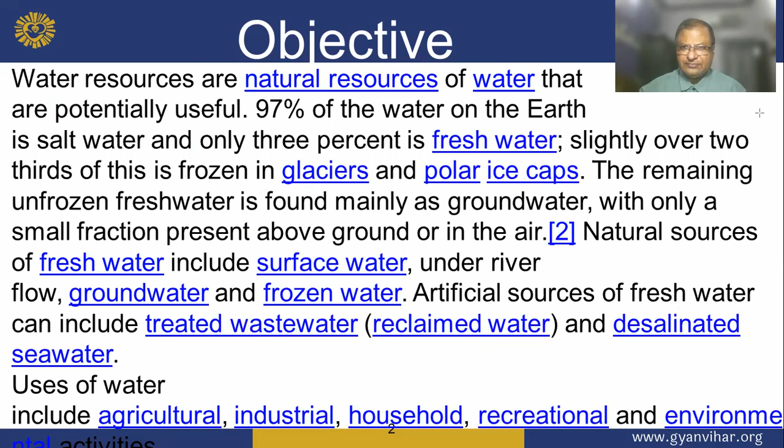Water resources are under threat from water scarcity, water pollution, water conflict, and climate change. Fresh water is a renewable resource. The world supply of groundwater is steadily decreasing, with the depletion occurring most prominently in Asia, South America, and North America, although it is still unclear.

how much natural renewal balances this usage and whether ecosystems are threatened. The framework of allotting water resources to water users, where such a framework exists, is known as the water right.

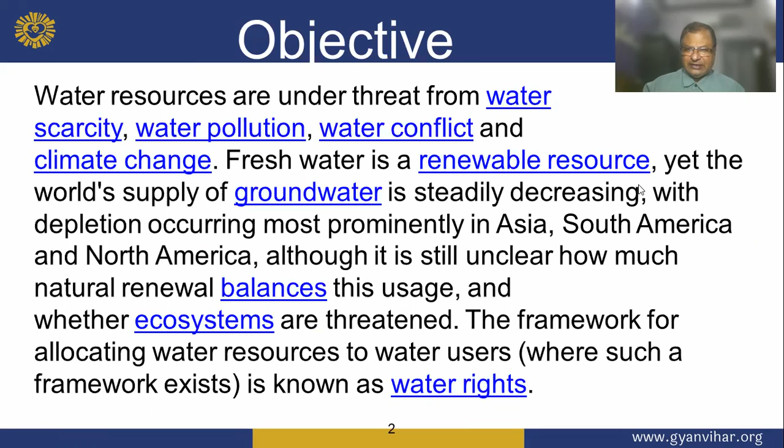So water is a vital element in each of our lives. Not only is it essential to our health, but we also use it for numerous household tasks. Every day we use water for cooking, bathing, cleaning, and drinking.

But how often do we think about its source? Where does our water come from? How is it treated? How do we know it is safe to drink? To answer this question, it is important to go back to the basics.

There are two main sources of water: surface water and groundwater. So, my dear boy, water is found in rivers, reservoirs. Groundwater lies under the surface of the land where it travels through and fills openings in the rock. The rock that stores and transmits groundwater is called an aquifer.

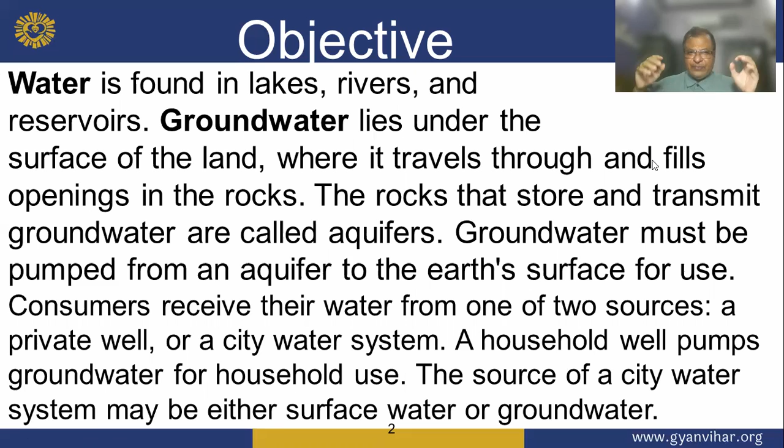Groundwater must be pumped from an aquifer to the earth's surface for use. Consumers shall receive their water from one of two sources, a private well or a city water system. A household well pumps groundwater for household use. The source of the city water system may be either surface water or groundwater.

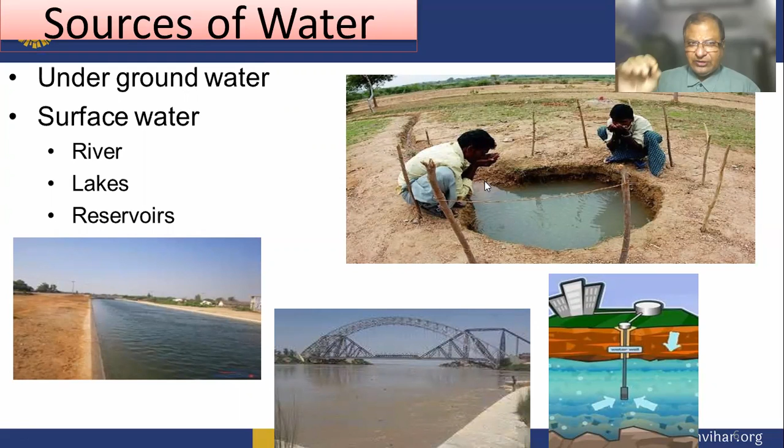Thereby, this is a photograph of groundwater and surface water. So, underground water and surface water means a river, lake, and a reservoir. Correct. Source, that is the main source, our main source is surface water. So river, lake, and reservoir.

Water storage. Treated water is pumped to a storage tank. A storage tank is often elevated. A storage tank serves two purposes: it stores the water until it is needed, and it reduces the peak demand on the treatment facility. So elevated water tanks create pressure in the water distribution system.

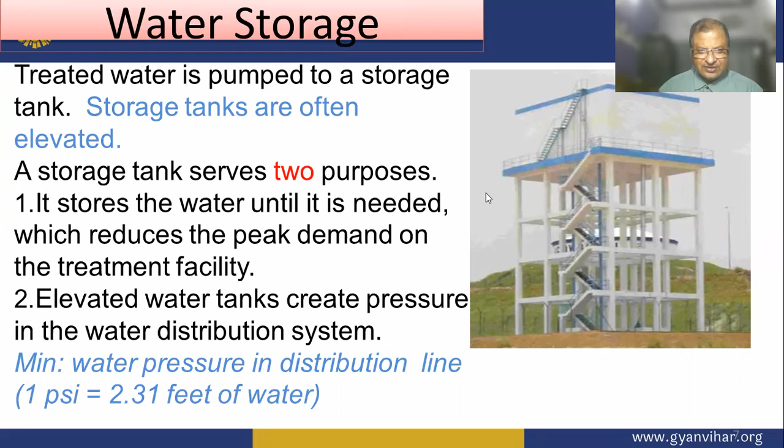This is the water distribution system. This is natural resources. So this is the water resources system.

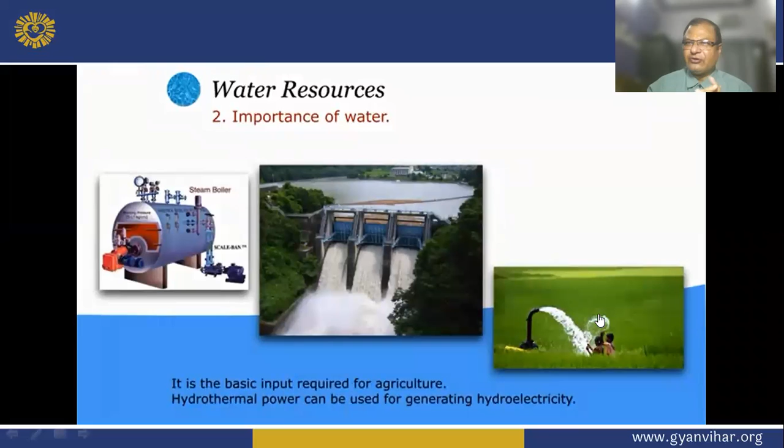So we will see the importance of water. It is very important for our human body, helpful for the survival of the body. Now, importance of water for agriculture, ecological purposes, and for factories.

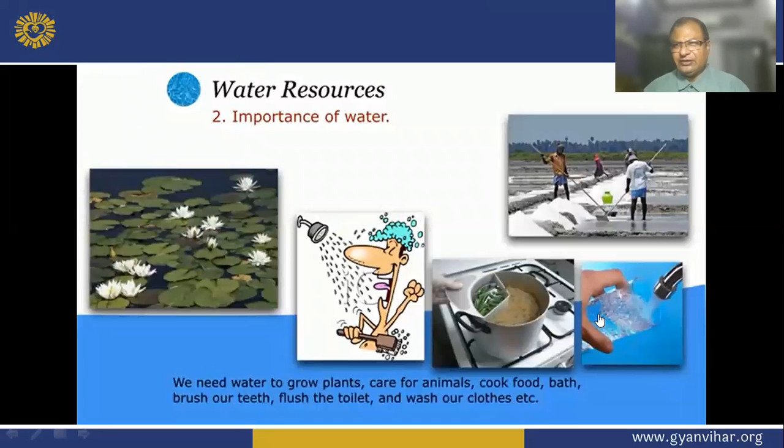So now we will discuss about the water cycle also. How soft water has come.

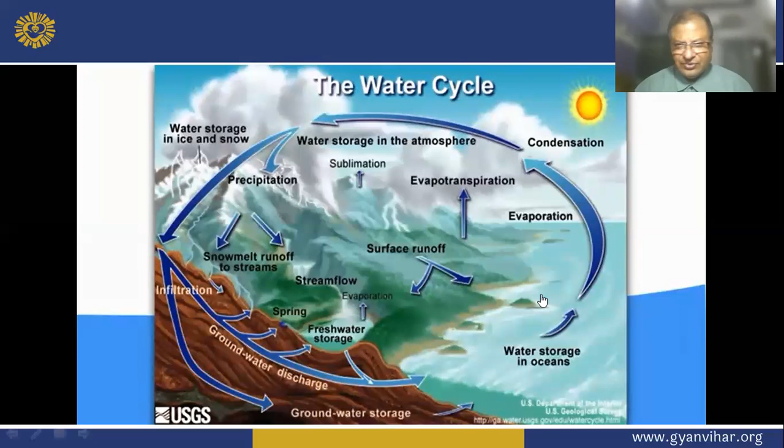So in this case, we will discuss what is the water quality for us. Water is one of the most important materials required to sustain life and is considered as the source of human immunity.

It is rarely available in natural form because it has great tendency to dissolve various substances while flowing on the surface of earth. The topic of water quality focuses on the presence of foreign substances and their effect on human and other aquatic life.

Now, at present, more than 85 chemicals are listed in the US EPA drinking water standard, whereas the World Health Organization listed over 100 chemicals in guidelines for drinking water.

So in addition to public need, water that is soft, non-corrosive, free from pathogens and suspended solids.

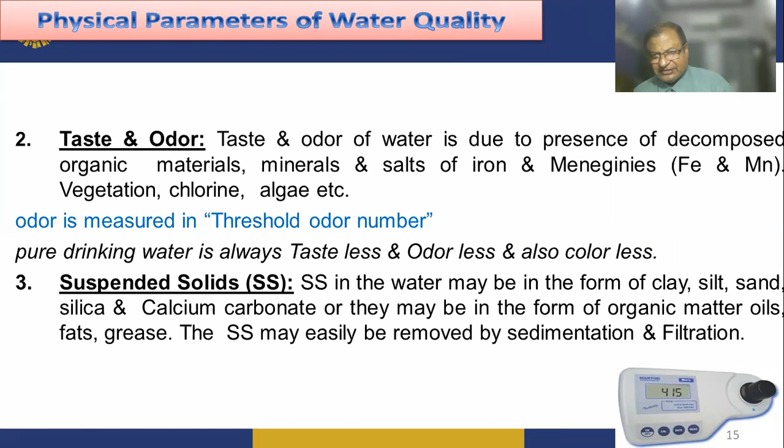Suspended solids in the water may be in the form of clay, silt, sand, and silica, calcium, and may also be formed of organic matter, oils, fats, and grease. The SS may easily be removed by sedimentation and filtration.

Now, my dear boy, turbidity. Turbidity is caused by SS fine insoluble particles, silt, sand, clay, and algae. So turbid water does not allow the passage of light, which is either scattered or absorbed depending upon the size and surface.

So completely treated water has turbidity of less than 1 turbidity unit. Now clear lake water has 25 TU, whereas muddy water has 100 TU. So turbidity is measured by the Jackson turbidimeter.

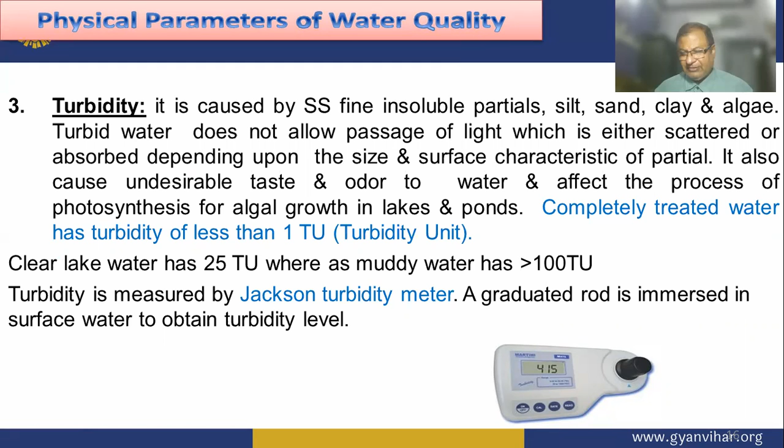A graduated rod is immersed in the surface water to observe the erosion and turbidity level. So therefore, this is the turbidity measurement.

Now we will discuss about temperature. Can you drink hot water regularly? Thereby, in drinking water, the temperature is required for drinking of water.

So solubility, viscosity, and chemical reaction are influenced by temperature. More quantity of chemical gets dissolved at higher temperature, but gases are released. Water should not have higher temperature because due to the heat, it will be converted into vapor.

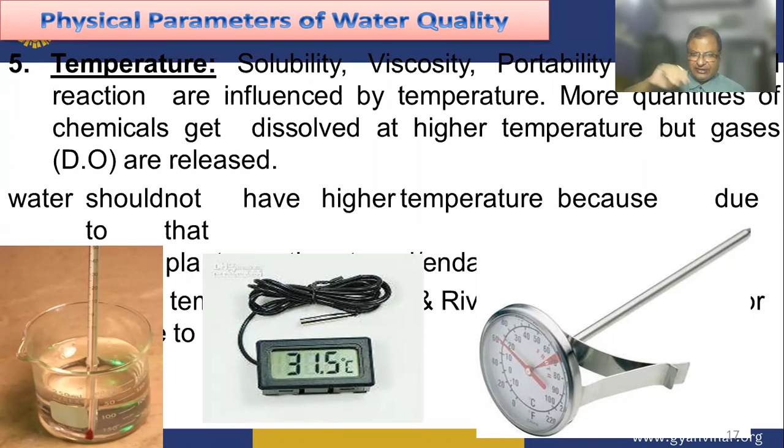The presence or absence of living organisms in the water can be one of the most useful indicators of water quality. The variety of species, the variety of fishes present in the lake, signifies unpolluted water. So, microorganisms: bacteria, algae, protozoa, and virus.

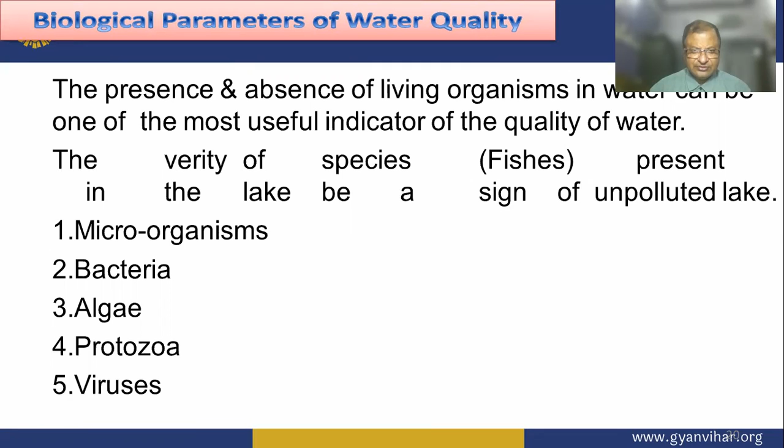Water requirement of any town or city is determined by two factors: first, consumption per head per day, or per capita demand, and population demand. P is the population of the city or town.

If Q is the total water requirement in a year, then per capita demand is calculated by the following formula: Q divided by P into 365, in liters or gallons per day. So what is per capita demand? This is the keyword, per capita.

Every person, how much water is consumed per day, on average over one year — that is called per capita demand.

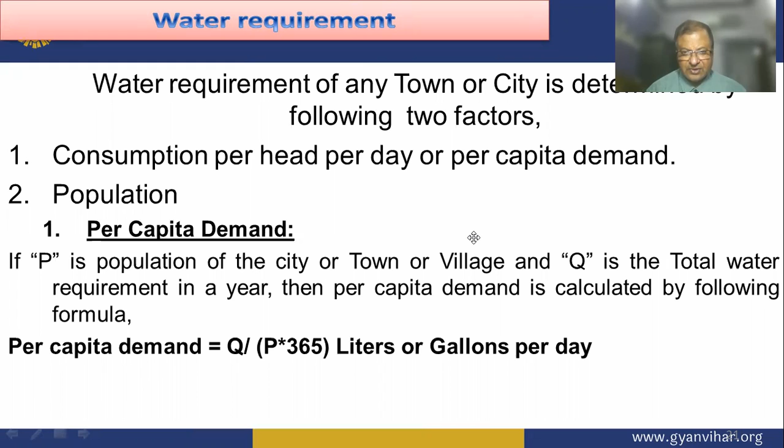Various types of water demand: domestic water demand, industrial water demand, public water demand, fire water demand, and losses and wastages.

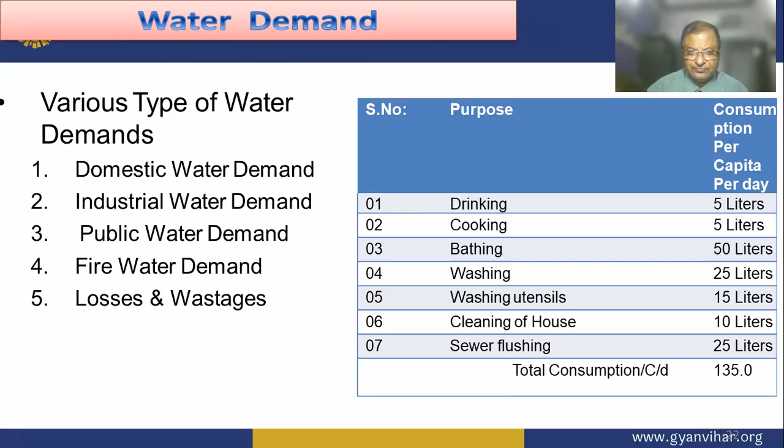A few important waterborne diseases to know about: salmonella, rotavirus, polio, hepatitis A, and so many sicknesses.

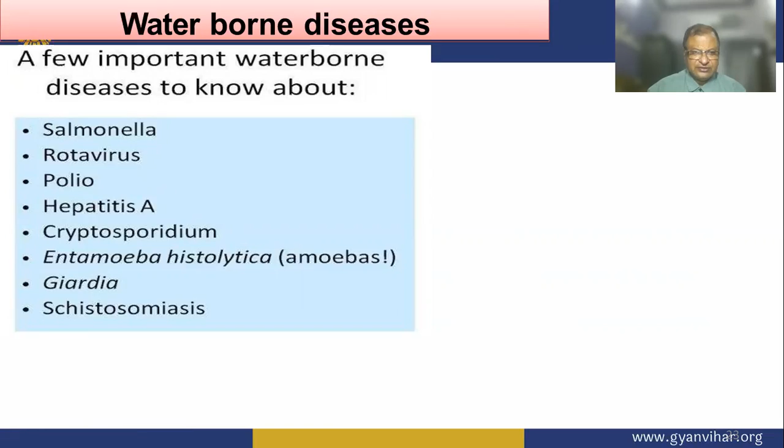This is the waterborne disease. From which type of water, what disease will be generated?

If lead is available in high quantity in the water, infants and children may experience delays in physical or mental development.

There is a high risk of getting cancer, skin damage, or circulatory system problems.

Now, fluoride causes bone disease, pain and tenderness of bones and mottling issues in children. Microbiological means bacterial infection, or viral infection, or pathogen infection. This infection is bacterial — this includes typhoid, cholera, and bacillary dysentery. These are the four names to prepare on.

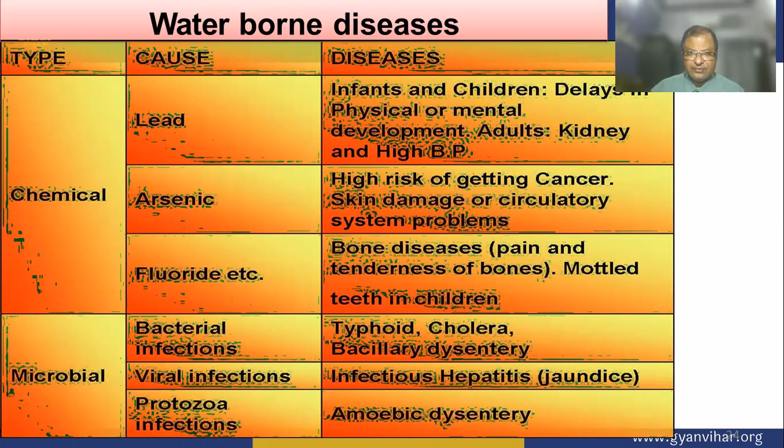The following are important points in any water supply scheme: financial aspect, population, quality of water, rate of consumption, sanitary survey of the area, source of water supply, topography of the area, and trends of town development.

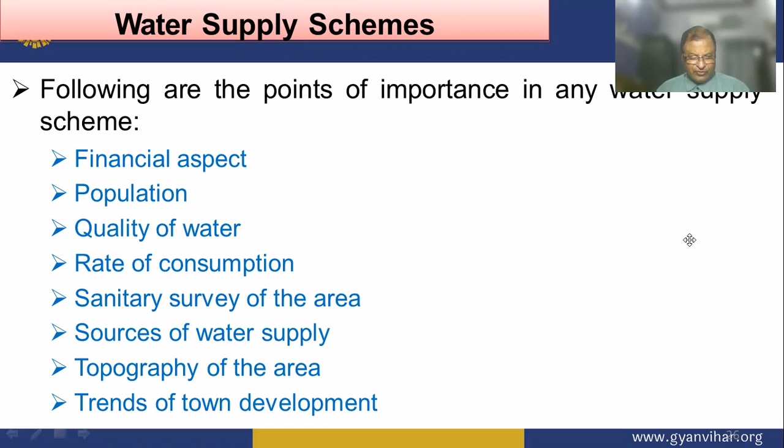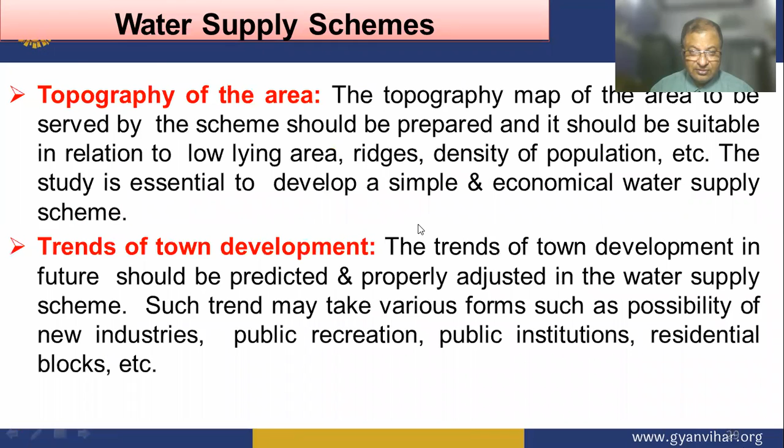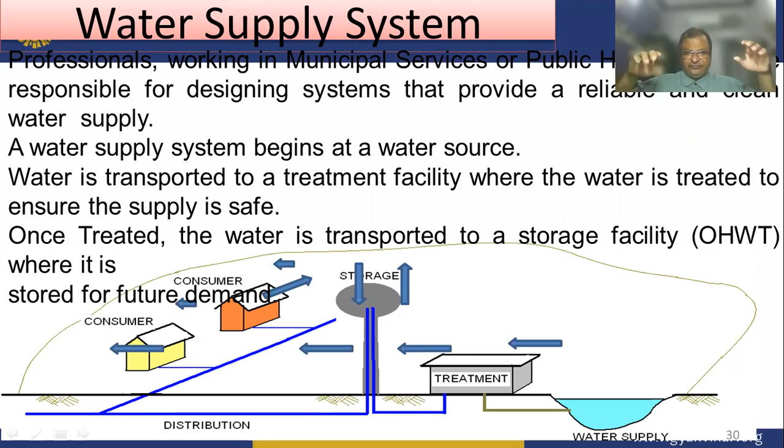A water supply system begins at the water source; the water is transported to a treatment facility where it is treated to ensure the supply is safe. Once treated, the water is transported to a storage facility where it is stored for future use.

The term population is used to indicate the present population, which is evaluated by referring to statistics from the census. The water supply project is not designed only for the present population, but is made to accommodate the future population.

The growth of population may be sharp, slow, or even stationary, depending upon factors contributing to industrial trade and expansion.

The future period for which various service units of water supply and sanitary engineering are designed is known as the period of design.

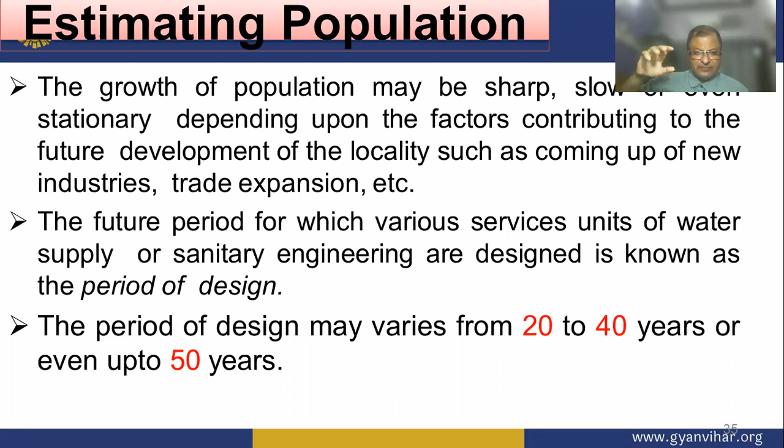The period of design may vary from 20 to 40 years, or even up to 50 years. This is the period of design for important components of the water supply project.

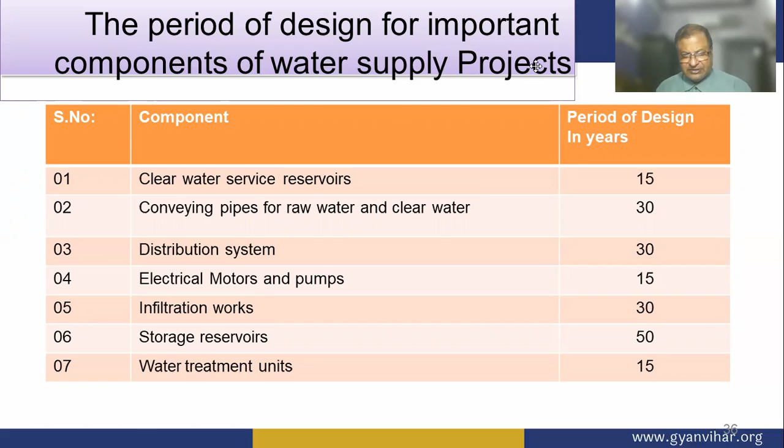So here are the components and their period of design in years: clear water service reservoir, 15 years; conveying pipe for raw water and clear water, 30 years; distribution system, 30 years; electrical motors and pumps, 15 years; infiltration works, 30 years; storage reservoir, 50 years; and water treatment units, 15 years only.

This method assumes that the percentage increase in population from decade to decade remains constant. From the census record, this percentage is fixed, and the population of each future successive decade is worked out. This fixation of percentage, in the case of developing cities, should be done carefully, otherwise this method is likely to give a high result. This method gives better results for old cities which are not growing rapidly.

Now, the incremental increase method. This method combines the above two methods. The population of each successive future decade is found by adding the incremental average per decade, combining the advantages of both above methods.

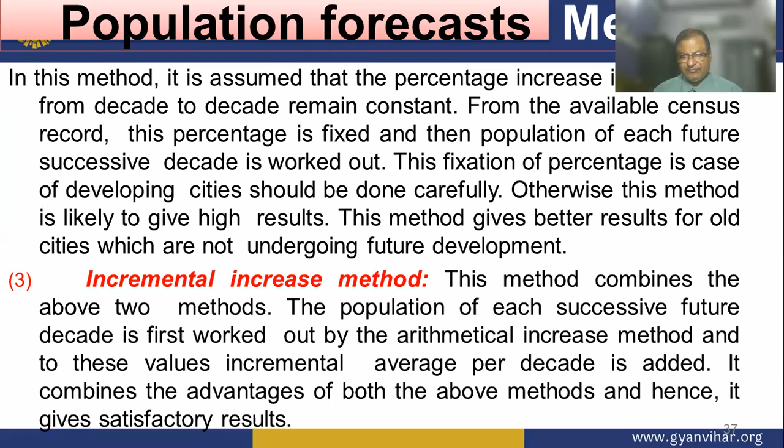Now we will see what is the water demand. In this case, water is needed for drinking, bathing, washing, and cleaning of houses, such as domestic demand, to be taken as 50% of the total water requirement.

Now industrial or commercial water demand: depending on the type of industry or the city where it is located, the percentage of water required is from 20 to 25% of total water requirement.

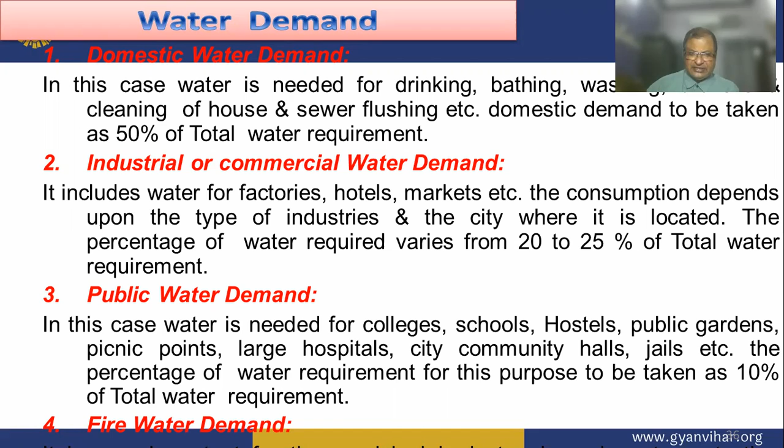Now public water demand. In this case, water is needed for college, school, hostel, public gardens, large hospitals, city community halls, jails, etc. The percentage of water required for this purpose is taken at 10% of the total water requirement.

Now, what is the fire water demand? First you should know what fire water demand is. Suppose we are living in a society and any day any house is burning - how will that fire case be solved by water? So this is the fire water demand.

So Q is equal to 1136, that is 1136 P over 5 plus 10. The National Board of Fire Underwriters formula is 4637 under root P into 1 minus 0.01 under root P.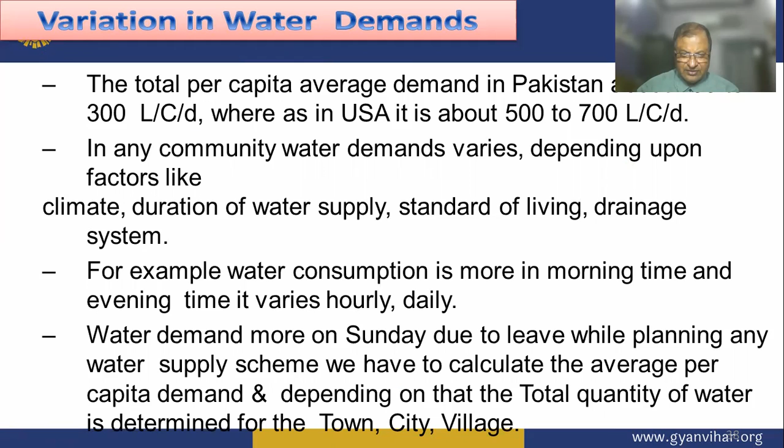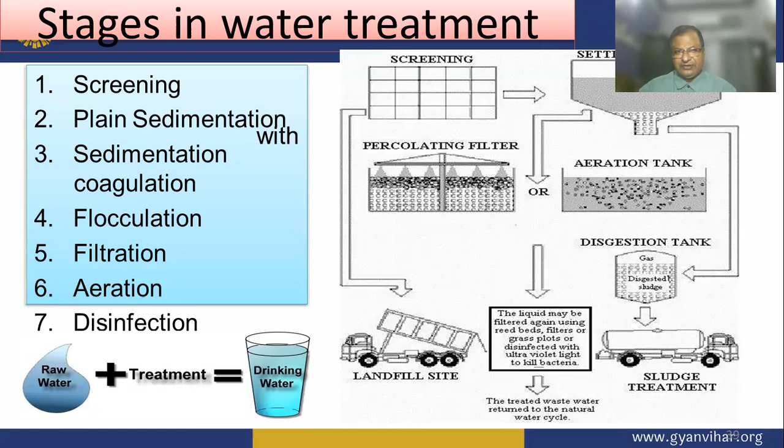Now we will discuss screening, plain sedimentation, coagulation, flocculation, filtration, and disinfection. These are the stages in water treatment.

So plain sedimentation - how is it done? The process of retaining water in a large basin so that the suspended particles may settle down due to the action of gravity is called plain sedimentation.

Now sedimentation with coagulation: the process of addition of certain chemicals in the water to precipitate the fine and colloidal particles.

Now flocculation - the flocculation process. In the flocculation process, fine and colloidal particles are caught by floc, and the size of the floc goes on increasing and then settles down, catching more impurities.

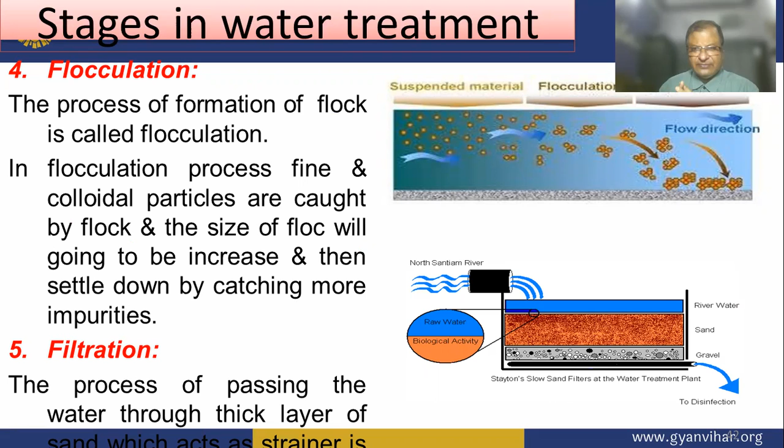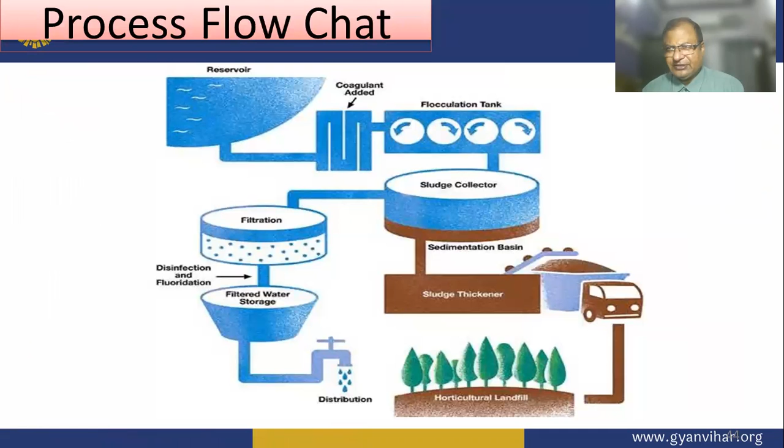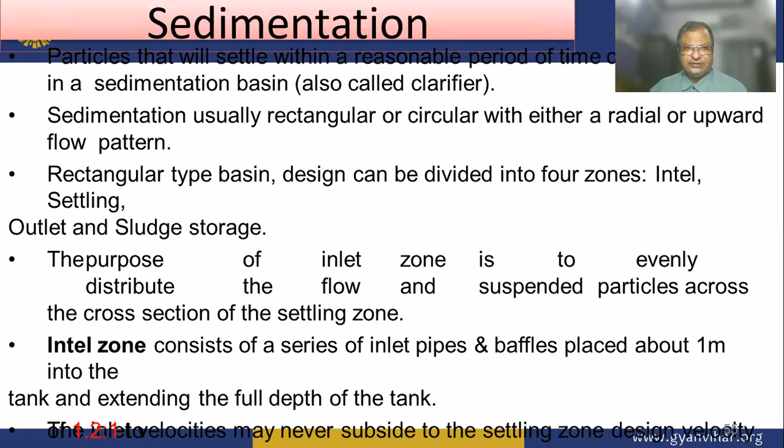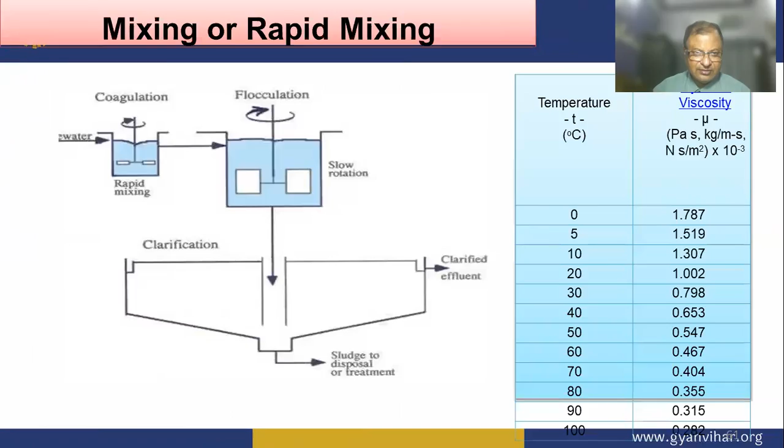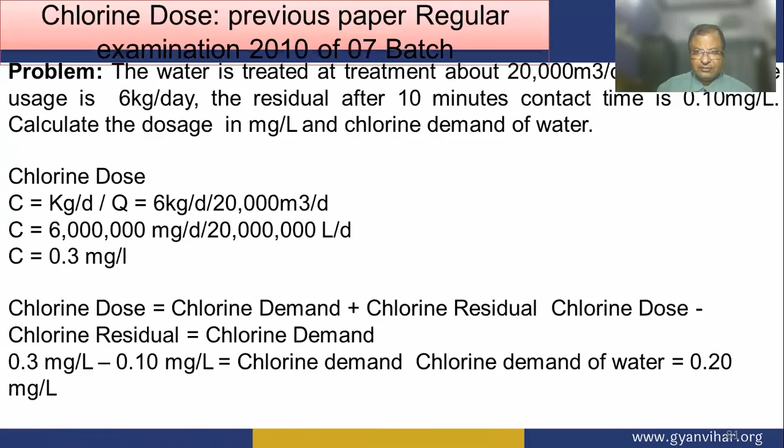Your chapter has been finished, so I will ask some MCQs with you.

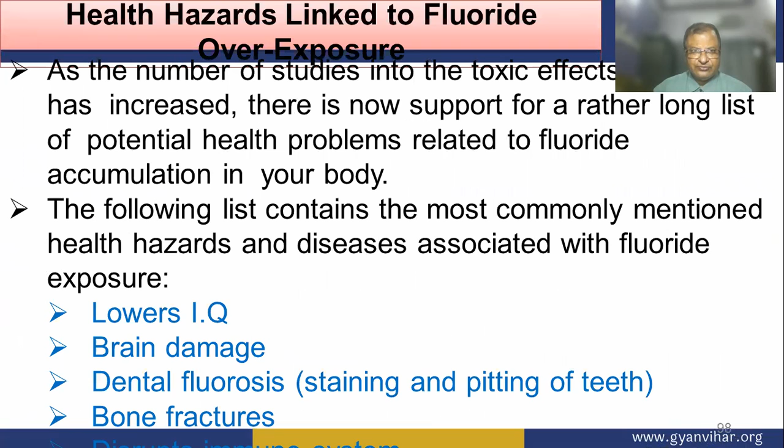Now, a hydroelectric scheme operating under a head of 80 meters - what would you say? What is the shape of the answer? Yes, correct answer is C, high head scheme.

A hyetograph is a graphical representation - what is the correct answer? It is showing rainfall intensity.